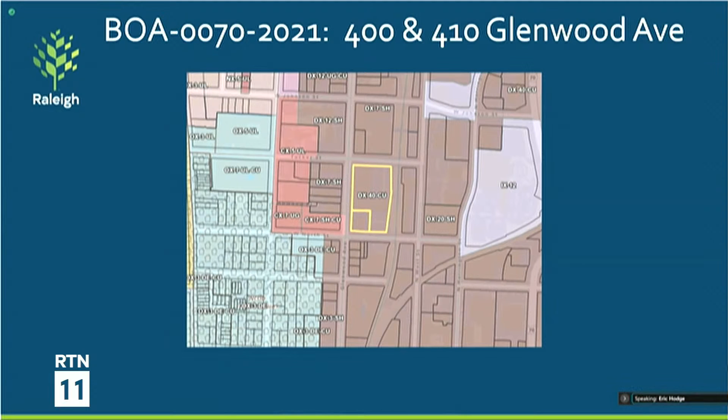The areas shown in gray are where the majority of the redevelopment is occurring, again with 2 towers: one at the southwest corner of this block, and the other running along the eastern side of the property between North Street and Tucker Street, with the eastern boundary of the property being the railroad track.

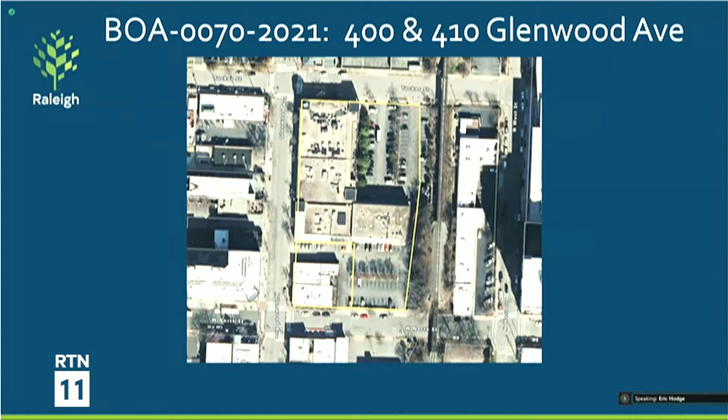I'm happy to answer any questions you have at this time, but I do know the applicant has a pretty detailed presentation that would go into a lot more of the specifics. I think you'll be able to understand what's under consideration once we go through the applicant's materials, but happy to answer anything if you have questions for me at this time.

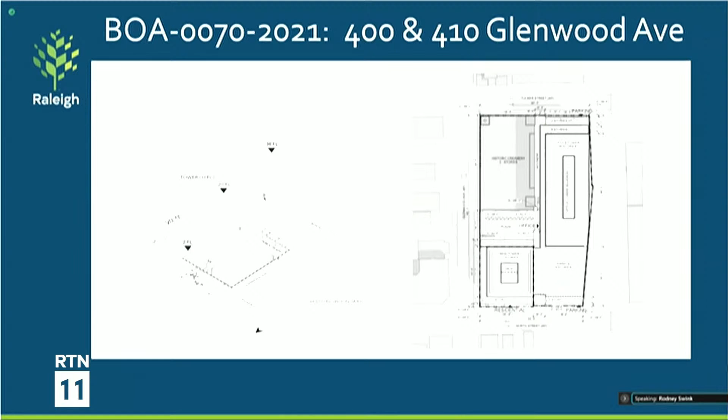Okay, thank you. Board members, any questions for Mr. Hodge? Okay, let's move on to the applicant, Collier Marsh. I believe you will be speaking for the applicant today. Welcome.

Good afternoon, Chair Swink and members of the board. I'm Collier Marsh with Parker Poe, 301 Fayetteville Street, on behalf of the applicant. I'd like to start by asking that our application, presentation, case report, and supporting materials be accepted into the record.

Okay. And we have several folks on the line, but we have one witness that I think most of the testimony will come from, and that's Fred Belledin, if we want to swear him in to start. Okay, let me go ahead and do that. Mr. Belledin, do you swear or affirm that the testimony you will provide will be the truth, the whole truth, and nothing but the truth?

I do. Thank you. All right, so the variances we have today relate to the proposed redevelopment of the historic Pine State Creamery site. As Eric mentioned, we're at 400 and 410 Glenwood Avenue. So 2 parcels, but 1 comprehensive development that looks at the whole site as a whole.

One of the things we're most excited about with this project is that as part of the redevelopment, the creamery itself, which is a local historic landmark, is being preserved. So our redevelopment occurs on the remainder of the site.

The site's gone through a number of approvals to get to this point already. Hopefully this is the last of the hearings, but the site was recently rezoned to DX40CU. We obtained 2 certificates of appropriateness from the Raleigh Historic Development Commission. The first of those addressed the overall massing, the setbacks, and the height of the project. And then the second got into a lot more of the detail and addressed the building design and materials.

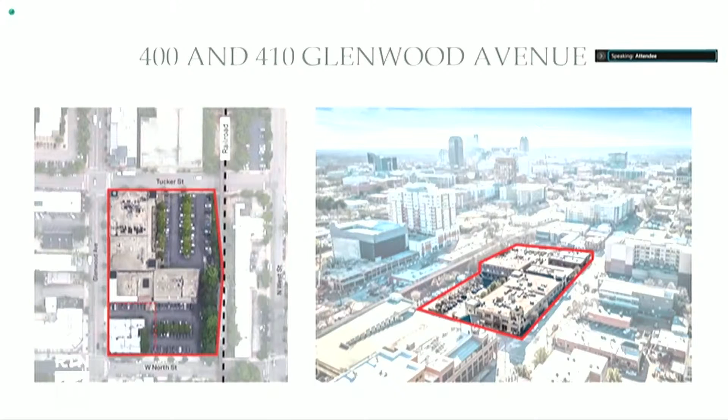The 400 parcel, the smaller parcel, as part of the zoning conditions, has shop front frontage applied to it, which impacts build-tos and setbacks. The remainder of the parcel could not have shop front frontage applied because the existing creamery building conflicts with those requirements. So if we're going to keep it, we couldn't meet it. The urban design guidelines would have called for shop front frontage to apply to the whole site.

It has frontage on Tucker and West North Street. That's the parcel where we're seeking relief, specifically on the West North Street frontage for setback relief, and on the eastern property line. The 400 parcel will be a 36-story mixed-use tower with frontage on Glenwood and West North Street, in the southwest corner of the site. There's also a galleria accessible to pedestrians and limited vehicle traffic that runs between the two towers.

You can see that large plaza running between the two sites, and the Woonerf running between the creamery and the 20-story building.

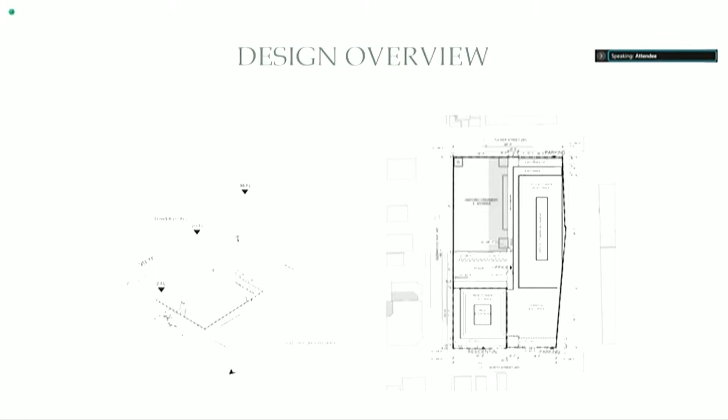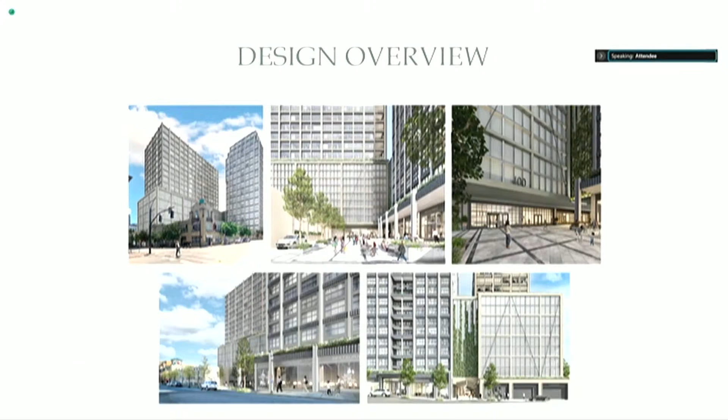So two things I want to point out with each of these requests. First, as I alluded to, we do have frontage on one site, the 400 site, but not the 410. But the UDO provides that if a frontage applies to the zoning of the site and the frontage has a build-to that conflicts with the setback requirements, that frontage's build-to actually controls. So here, the 400 parcel has shop front frontage, and what the UDO says is that you can have a 0-foot build-to with shop front frontage. So that 400 parcel is allowed to have a 0-foot build-to and doesn't have to comply with this 3-foot setback. But the 410 parcel, because we couldn't apply shop front frontage to it with the creamery, doesn't have the benefits provided by shop front frontage, but otherwise we've done our best to align the two buildings together.

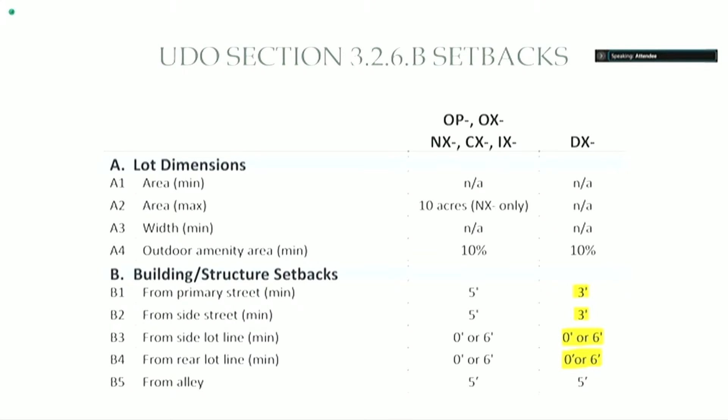Next slide, please. So as noted in the board's materials, we were originally seeking 6 total variances, although they only involved three total setbacks. Variances 1 and 2 related to Tucker Street, but our team worked some more to try and make some adjustments, and we no longer need relief on Tucker Street. So we have eliminated items 1 and 2 from our request, which takes us then to items 3 and 4.

Those relate to the West North Street setbacks, and we're seeking a 2-foot variance to allow a 1-foot setback on West North Street. But that is listed as 2 variances, one for the primary street and one for the side street, because due to the different buildings and entrances, it's not clear whether we have a primary street or side street. So we ask for both, just to make it clear under either interpretation.

Then the next two, or the last two variances, are variances 5 and 6 in your materials. They relate to the setback on the eastern property line along those railroad tracks. They seek a variable width setback ranging from 0 feet to 8 feet. Like the previous variances, it's listed separately as a side lot line and rear lot line setback because it's not clear which applies. So we're just asking for both, but it really is just one setback.

So at this point, I'd like to call our witness, Fred Belledin. Fred, if you could state your name, your address, your education, and your experience for the board.

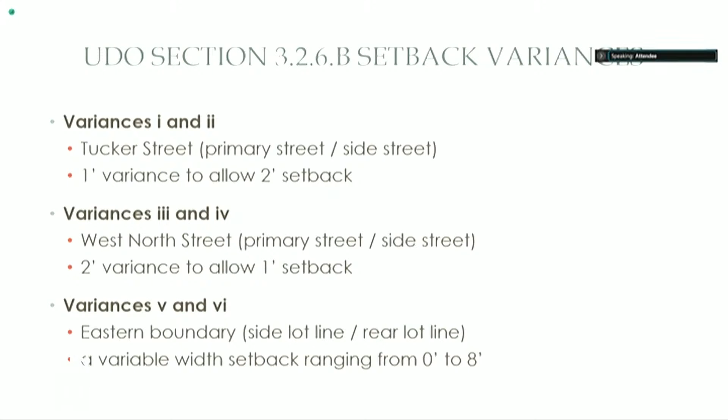So Fred, if you don't mind, walk the board through the factors that are driving the setbacks and then the relief that we are seeking. Sure. In this particular case, the source of the first variance or pair of variances is related to reconciling the differences between the 400 and 410 parcels. In particular, with the Creamery as the centerpiece for the redevelopment of the project, we are applying historic preservation best practices throughout the project, exemplified through the 2 certificates of appropriateness that we've received. Conversely, as Collier pointed out, the 400 parcel, because it is not part of the landmark designation, has a slightly different set of streetscape requirements based on the UDO.

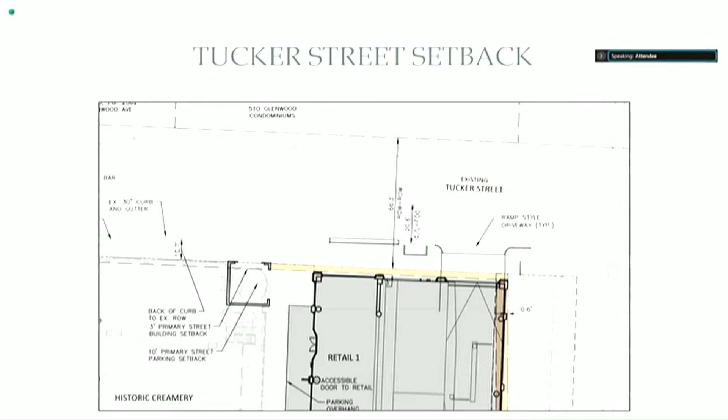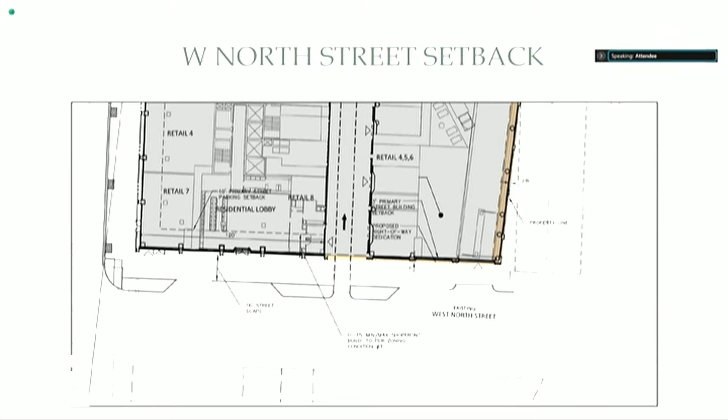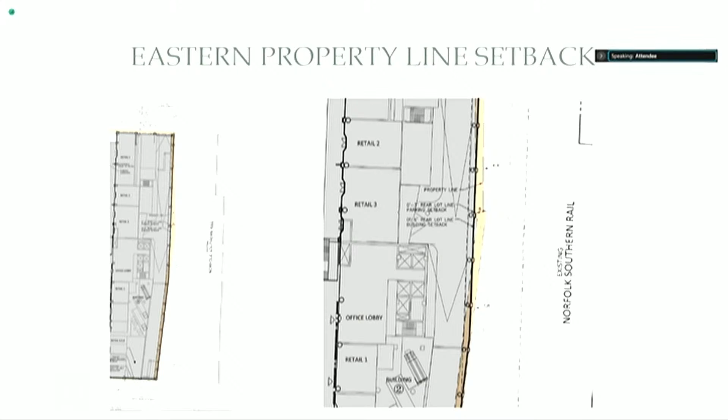So I'll quickly review the application of the variance findings to each of our requests, starting with the West North Street request, where we're seeking a 2-foot variance from the 3-foot requirement in order to have a 1-foot setback. Here, unnecessary hardship results because strict application of the ordinance results in conflicting standards for our two buildings.

We're doing our best to align all buildings with the existing street line and street wall established by the creamery. We're able to do that on the 400 parcel because it has shop front frontage that allows us to go right up to the streetscape and right up to the property line. Unfortunately, the same creamery that dictates building placement prevents us from applying shop front to the 410 parcel, so we don't have the same rules that apply, and we don't get to go to 0 feet automatically. So we have to seek relief.

This variance allows us to resolve that conflict and advance the historic preservation goals that drove the building design. Hardship results from conditions peculiar to the property—the existence of the historic creamery—and it allows us to do what we think is one of the best features of this project. We can preserve it this way, and design a project around it that honors it in the most appropriate way.

This did not result from actions taken by the applicant or the owner. It's merely the existence of that historic building that dates back several decades. It's also consistent with the spirit, purpose, and intent of the ordinance, because this resolves a conflict between the application of shopfront frontage across the entire site, while also allowing us to advance the historic preservation goals and design a project with historic preservation best practices.

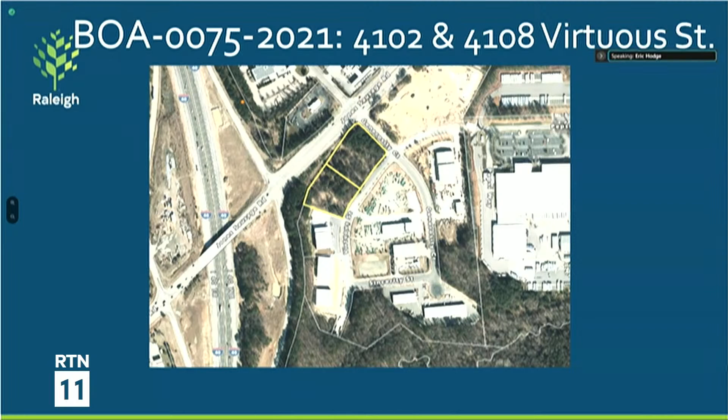The property is for the construction of a hotel on a 3.63 acre site zoned industrial mixed use 3, located near the intersection of Jones Sausage Road and I-40, an industrial area. In the lower right-hand corner is the Pepsi bottling plant, for orientation. On the right side, Pepsi Way leads to the Pepsi facility. Currently this parcel has this configuration, but there's a proposal to move the property line between these two parcels to the northeast, making the lower portion of these two sites larger. That's the portion under discussion for today's variances.

The first request is for a dumpster location that doesn't entirely conform to the locational requirements set forth in UDO 7.2.5.C.1. Briefly, that section says trash collection, trash compaction, recycling collection, and other similar service areas shall be located to the side or rear of buildings and must be screened from view from adjacent property or public street right of way. I'll let the applicant go into further detail regarding the dumpster facility, but it's proposed to be in the northeast corner, the upper right-hand corner of the site if north is at the top of this image.

The second portion of the request deals with the driveway in the lower left-hand corner of the site, where it is too close to the driveway on the property located to the southwest, or to the left in this image. Ideally it would have been located further to the right to better align with the driveway across the street. We do have transportation on the line if you'd like more specific detail on their thoughts regarding this variance. Otherwise, I'm happy to turn it over to the board for questions of me or transportation staff, or you may want to give transportation the opportunity to comment before the applicant makes a presentation.

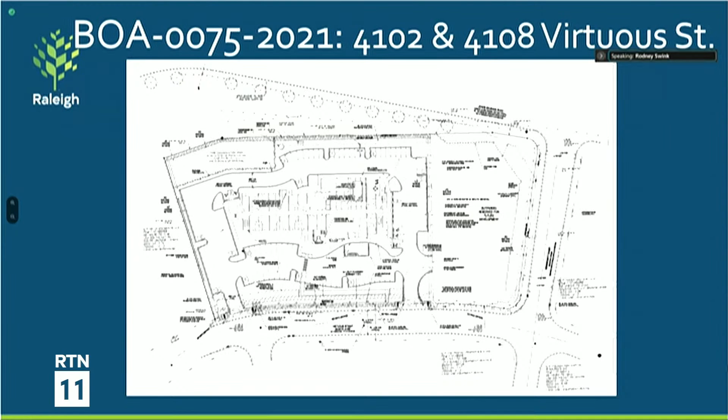We just spoke at length with Ms. Maddox and her client, and don't have any concerns to state for the board today. Okay, Glenn, thank you, appreciate that, and appreciate you being here. Board members, do you have any questions for either Mr. Kidd or Mr. Hodge? No one? All right, let's move along to the applicant then.

Isabel Maddox is here to speak to the case. Welcome. Thank you, can you hear me? Yes ma'am. Good, I'm on a new device today so I was a little concerned it might not work. I'm Isabel Maddox, PO Box 946, Raleigh 27602. I'm here today representing South Raleigh Suites QOZB LLC, an entity developing a hotel in an opportunity zone. Paul Meter, engineer with Rivers and Associates, is also on the line and can speak to any specificity about the engineering issues. First, I'd like to make a motion that the application materials and exhibits be admitted for the record. Okay, and let's go to our next slide please.

So we do have some hardships on this site. You saw the site plan a little bit, and we'll get to it again in a minute. We've got frontage on 3 streets: Jones Sausage, Virtuous, and I think it's Generosity. These street names are great. It's also a fairly small site. We do have a shod overlay. We have challenging topo with significant fall from the rear of the site to the front. But there's 3 street frontages, so what is the frontage? That's one of the main issues on the first request.

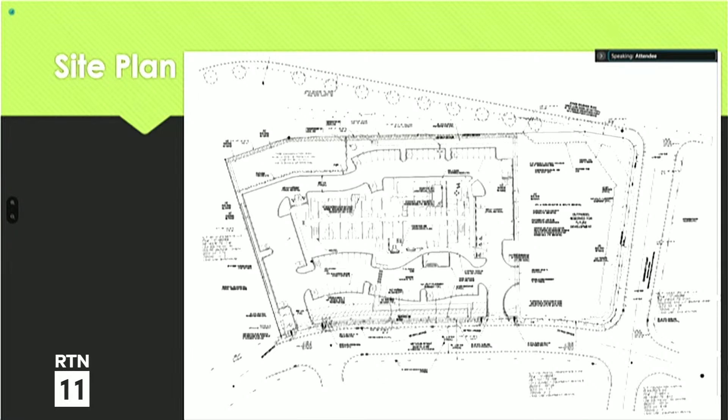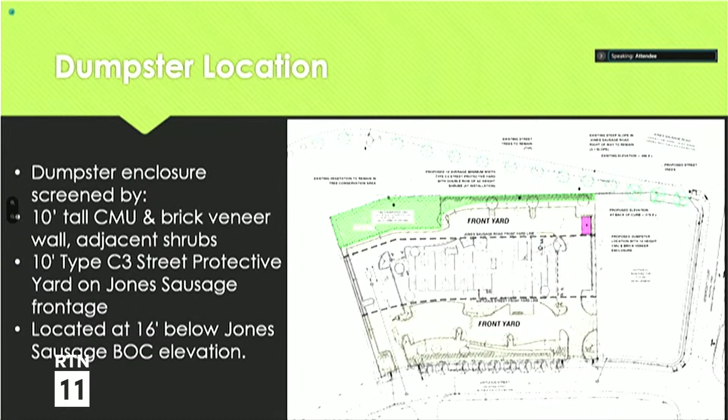So that shows a little bit better where the dumpster is. The green shows the landscaping that will be there to screen the dumpster. And I think the topo there is significant, which will eliminate really any ability to see it from the street.

We don't think it's really that meaningful to place it opposite the driveway across the street, because across the street is Sunbelt Rentals Equipment Company, and that's where their service entrance is. We don't really anticipate that the hotel patrons coming out of our site are going to want to go across the intersection. Normally you want a four-legged intersection with streets directly aligned so traffic moves efficiently across it. But in this case, we don't anticipate any traffic going from Sunbelt Rentals to the hotel site. They're just totally different types of users.

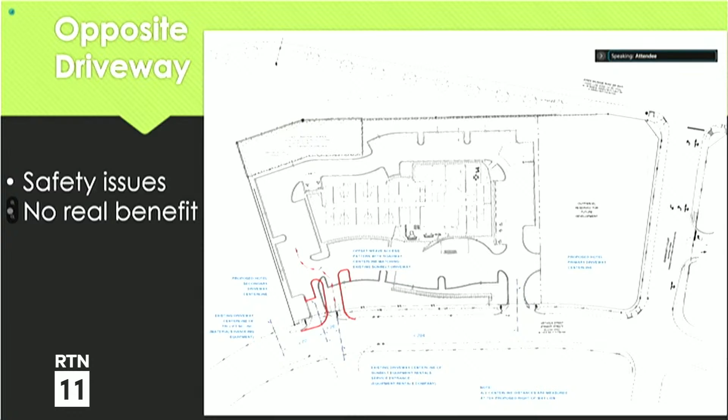And we do believe that we do have hardships here. We have frontage on 3 streets. We have significant fall on the property. We have the character of the traffic, it varies in this area. We're proposing to do a hotel, which we think will bring a much needed hotel to this area. It is an opportunity zone development. It'll bring some jobs to the area. And we think that the dumpster will be well screened by vegetation and by the fall and the property elevation.

The driveway spacing we think will maintain efficient movement and traffic. It's a dead end street, light industrial traffic, and we don't think the operation hours, the traffic hours will be the same for these two types of traffic. And we think that it's a real benefit to the city to have a hotel on this site.

So I do think that we have shown you that we have hardships. Those hardships were not self-created. We do think that safety will be preserved, and that this will be a positive development for the city. Mr. Meter is here to answer your engineering questions, and I'm here to answer whatever other questions you might have. Thank you.

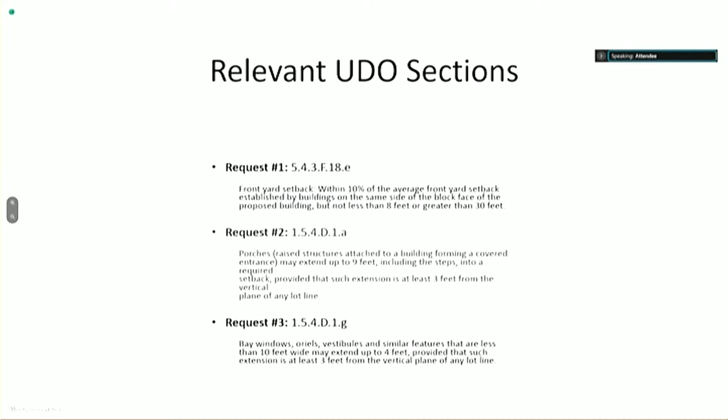So if we go to the next slide, these are the relevant UDO sections, which has already been covered. So we can move on to the next one.

Again, the request here is that we're given the appropriate amount of setback encroachment such that we can match the conditions of the adjacent buildings, and as a result create a continuous street front that forms a strong block face.

And the concerns here additionally is that the setbacks are calculated as an average, but not every lot has the same depth. A setback that seems appropriate for a lot that's 200 feet deep -- that would be 306, 314, and 316, very long, deep lots -- may not work for our current project site, which has been subdivided at some point prior to the owner's acquiring of the site. So we are left with only 70 feet in which to build a structure. Every foot counts in this case, and a typical setback that you might find on a deeper lot may not work on a much shallower lot.

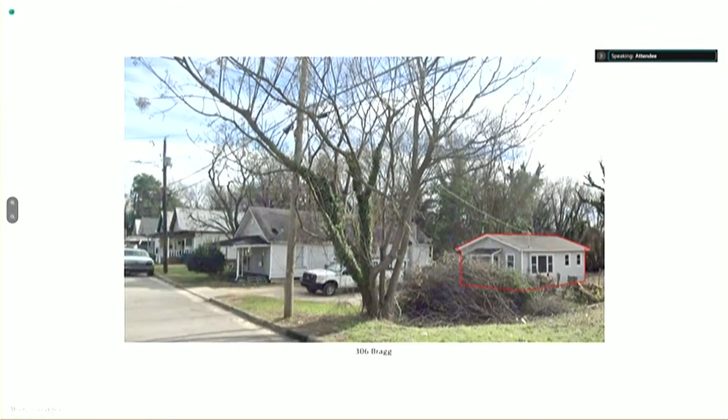And if we go to the next slide, we have 306 Bragg, which is, I'll call it a problematic or rather non-conforming property, which is set back quite a bit from the street. It's definitely an anomalous condition not found anywhere else on this block. So this is kind of the crux of the issue.

The 5.9 foot encroachment that we've proposed is not a random number. It's simply the calculation of the average setback that excludes this particular property. So in effect, what we're asking is that we're allowed to continue to use the NCOD rules, just without including this non-conforming site in the calculation method. So next slide.

So once again, this is a site plan facing north for 322 Bragg, measuring 70 by 30. Next slide.

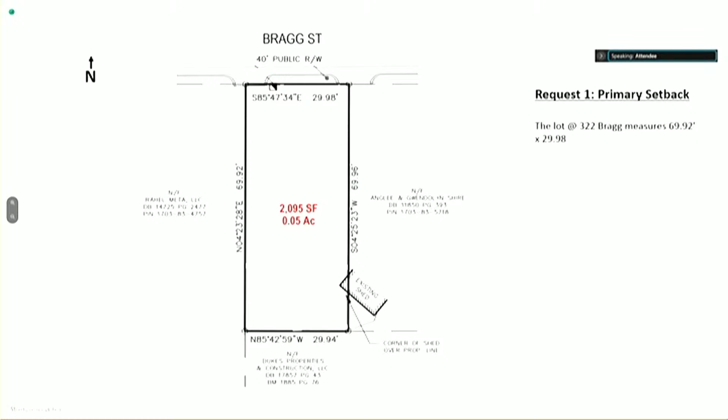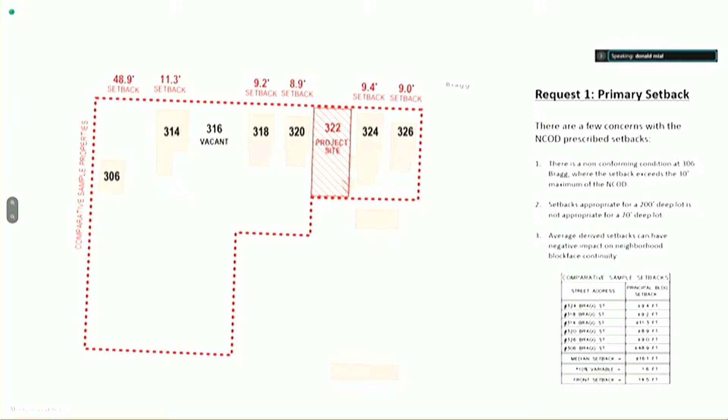So is there a safety concern there, if that be the case? As soon as people step out of their home, they run right into the street? The current fabric of that particular block exhibits that condition, and there is a little bit of buffer, in that the right-of-way doesn't start until at least about 3 feet past all of the setbacks we've just discussed. I think there's a 3 foot minimum setback required from any property line, so that we are preserving that buffer, so you don't walk out of your porch directly onto Bragg Street.

Okay, all right, thank you. Yes, thank you, Mr. Mial.

I do have a question, and it probably speaks to my misunderstanding about architectural features, but the bay and vestibule opportunity and the porch are added together, and I'm trying to picture a situation where you would have both present. If you have a front porch across the house, I don't see why you would have a bay. So I'm trying to understand why we're getting credit for both of those distances. Maybe it's not possible without a drawing, but can you explain that, Mr. Choi?

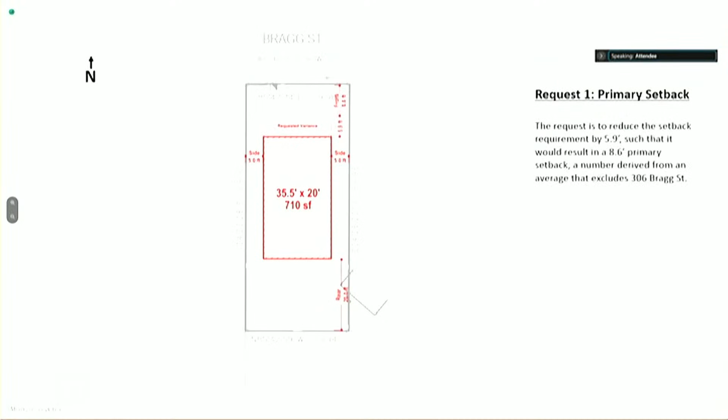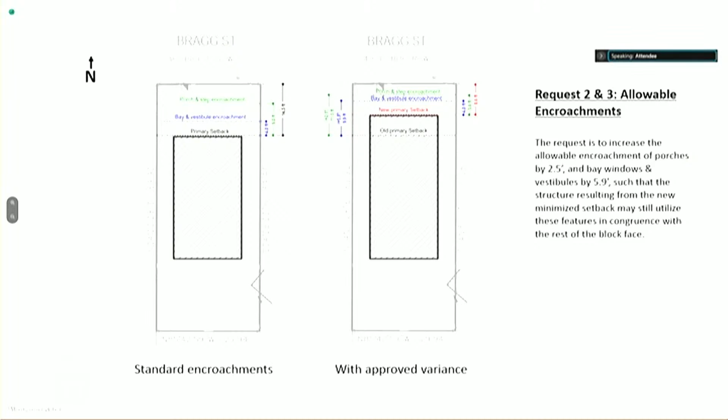Yes, one clarification I'll make is that those two encroachments are independent of each other, not on top of the bay encroachment. In this drawing, if we go to the next slide, which is zoomed in, I'll start with the standard encroachment on the left. The blue line is where one could project either a bay window or a vestibule no wider than 10 feet, projecting up to 4 feet past the primary setback. The green line is where you can project a porch or an entry step into the primary setback, labeled 9 feet.

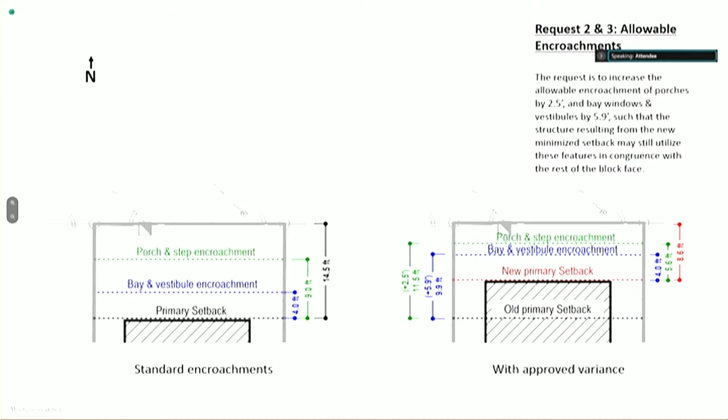So the way they relate to the primary setback is independent of each other. It wouldn't be bay window then porch added on top. Okay, yeah, they're not cumulative. Okay, thank you, I appreciate the clarification.

Okay, any other board questions? No one? Okay, again, no one signed up in either support or opposition to speak on this, so any closing statements from the applicant? Nope. Anything else from Mr. Hodge? No, sir.

Okay, moving along, evidentiary hearing 4. It says 10608 and 10604 DeHuston Court, 11258 Raven Ridge Road. This is the Raven Ridge Development LLC property owner. This is variance 78-2021.

Mr. Hodge, I understand we have urban forestry staff available if we need them, but I'm going to ask you to make the presentation and then we'll see if we need to do a reaffirmation of the oath. All right.

Property owner Raven Ridge Development LLC requests a variance to Unified Development Ordinance Section 9.1.9.A.1, which requires that trees must either be preserved or planted as one contiguous area or scattered areas throughout the lot, but that no required tree area may be less than 1/5 of the total gross land area required to be set aside for trees. In order to designate forestation areas on the site, the applicant is proposing areas that are less than 1/5, or in this case, 1.23 acres of the required 6.16 acres of tree forestation in association with the construction of townhomes on a 20.22 acre assemblage of land.

Properties located at 10608 and 10604 DeHuston Court and 11258 Raven Ridge Road.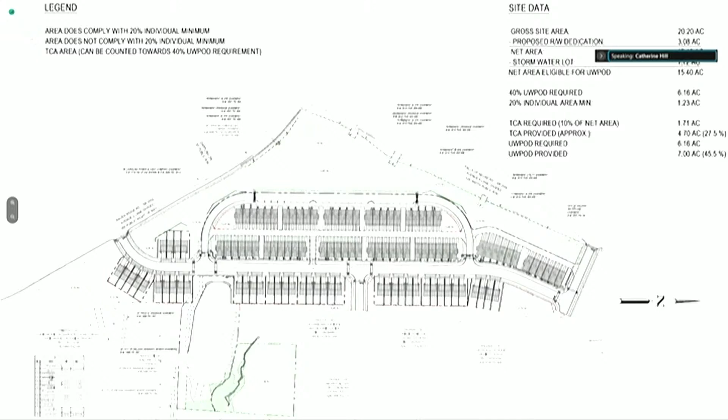I can try. One thing you have to, I'm trying to see, what is this property zoned? PD, okay. So part of your hardship analysis is what is a reasonable use of the property. And sometimes that has to do with what are all of the allowable uses on the property. If all they can do is a single family home, you have some balancing that comes in with that. So just because they're proposing a variance to allow for more townhomes does not in and of itself mean that it's a self-created hardship. There's that balancing test about what is a reasonable use of the property.

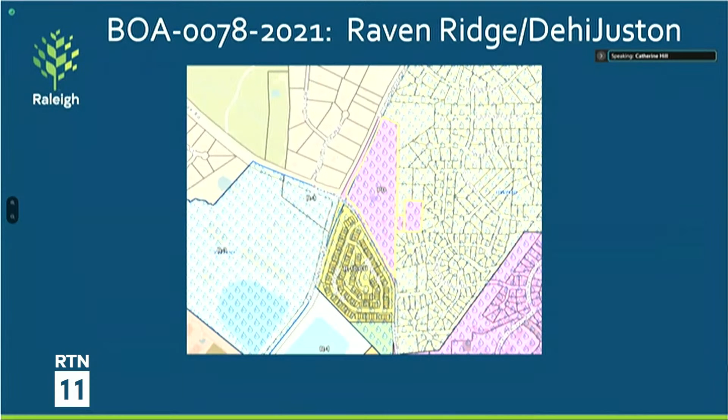Self-created hardship is normally more direct. I've seen property that's been subdivided in such a way that now, by the property, they did something where they put themselves in a position where they couldn't comply. But I do think it's a great question, and it comes down to that balancing test and what you think is an appropriate, or the board thinks is an appropriate and reasonable use of the property.

Right. Okay, thank you, that helps. And again, I think the efforts to meet the forestation requirements are legitimate, but I'm just trying to understand that little threshold, what triggers that. So thank you. Other board member questions? Anyone?

Okay, we have no one signed up to speak in support. We do have an opponent signed up today, Novelet Judge.

If you're with us, would you please state your address and your relationship to the case, and I will reaffirm your oath. This is Keegan McDonald, the moderator. I am not seeing Novelet Judge listed on the attendee list. Perhaps they're logged in under a different name, and if so, they can send me a message, but again, they are not listed as an attendee. Well, thank you. That's why I said if you're here, because I wasn't sure. Thank you for clarifying that.

So in that case, board members, any other questions from you? Mr. Mills, anything you'd like to add in the way of closing statements? Yes, sir, Mr. Swink. Thank you.

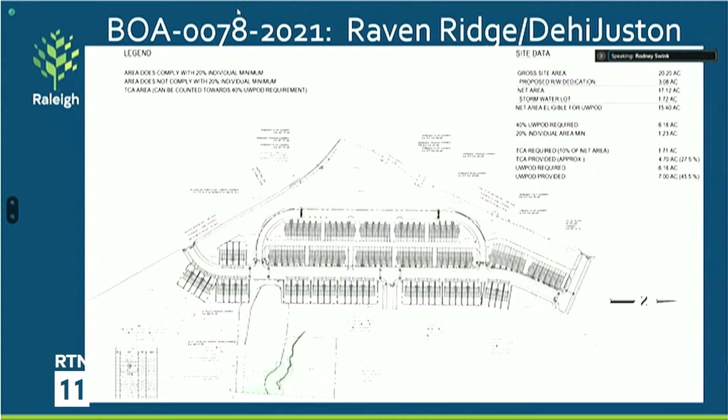Anyone? This is Mr. Mile. I'll go ahead and make a motion to approve. Thank you, Mr. Mile. May I have a second? I'll second. Thank you, Ms. Rudisill. We have a motion to approve and a second. Any further discussion? Let's move to a roll call vote, please.

Thank you. On the motion to approve: Mr. Mile, approve. Ms. Rudisill, approve. Mr. Coons, approve. Mr. Rainey, approve. Chairman Swink, approve. Thank you, that makes 5. Okay, thank you very much.

Now let's move along to our next hearing, number 5. This is 3249 Blue Ridge Road, the Summit Church, Homestead Heights Baptist Church Incorporated, property owner, variance 79-2021. Mr. Hodge.

The owners, the Summit Church, request a 0.5 acre variance to Unified Development Ordinance Section 9.1.3, which requires that properties 2 acres or greater dedicate at least 10% of its gross site area as tree conservation area prior to subdivision approval, resulting in 0.89 acres of tree conservation if approved, in order to subdivide the 13.89 acre parcel. It's a split zoned piece of property, the right portion being R4 and the left, or southwestern, portion being office mixed use 3, parking limited, conditional use.

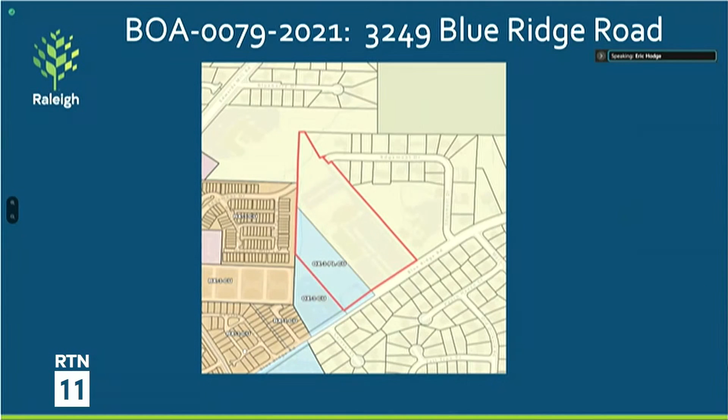There's an office building as well as the church property located on the right-hand portion of the property. Again, they're looking to subdivide the parcel in the lower southwestern portion of the property, similar to where the zoning line is today for the OX3 PLCU. Again, this area in blue is what's up for subdivision. However, the acreage of the entirety of the parcel is what triggers the amount of tree conservation that would need to be included.

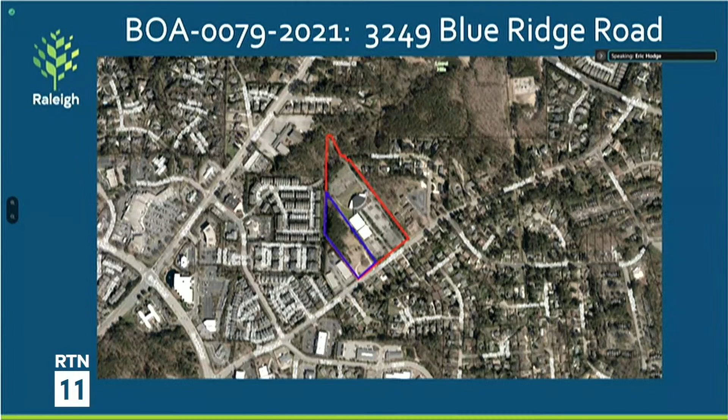Here's the subdivision plan and proposed tree conservation areas. I would note that in board docs, just prior to the beginning of this meeting, we updated the information with some updated slides, which I believe are in this presentation, as well as a revised condition that has been reviewed by the city's forestry staff and city attorney's office. That language is in board docs as a new attachment, I believe it's called proposed condition and exhibit, if you all would like to have that available when we get to that portion of the conversation.

But similarly to this last matter, this is a tree conservation issue. Chris Crum, being the subject matter expert, can go into more detail regarding the requirement, the variance request, and if needed, the details of the proposed condition. Okay, thank you. Now that might be better left for once the applicant has presented. Yeah, sure, thank you, good guidance. Board members, any questions for Mr. Hodge? And we'll hold Mr. Crum in abeyance.

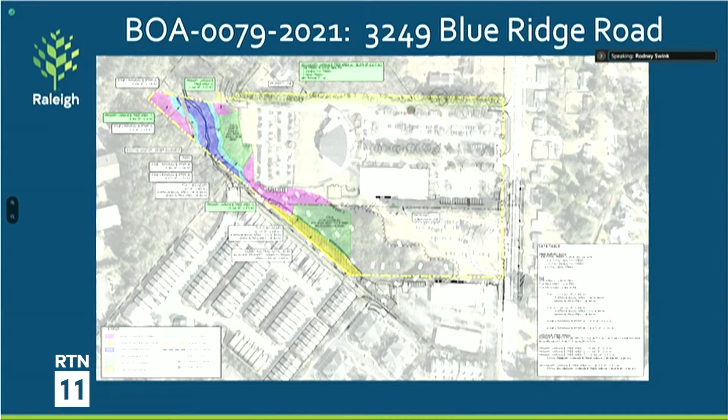Let us move now to Mr. Michael Birch of Worth Mills on this case. Go ahead. Yes, sir, Chairman Swink, this is Michael Birch. Can you hear me okay? Yes, sir. Thank you. Great.

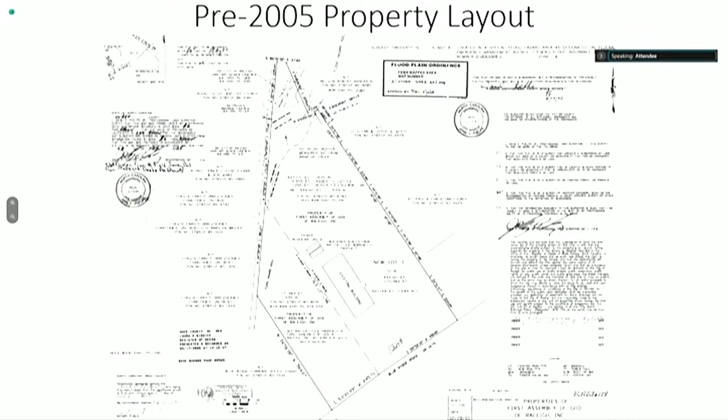So if we can go forward one slide. Again, I want to touch on the history of the property. So the buildings that you see on the old church property, the 9.9 acre portion of the property, those buildings and parking areas all existed prior to the recombination in 2005.

The 2 buildings with the white roofs closest to Blue Ridge were built in 1978, along with the parking areas beside it and along Blue Ridge Road. The building behind it and the parking lot behind it, those improvements were made in 1997. So all of these improvements on the 9.9 acre property were made prior to the tree conservation area regulations, which weren't adopted and imposed until 2005.

When the predecessor church made the improvements in 1997 for that new building and parking area, it removed what was essentially all wooded area. It removed a significant number of trees that could otherwise have qualified for protection as tree conservation area, if the regulations were in effect at that time. But of course, they weren't in effect then.

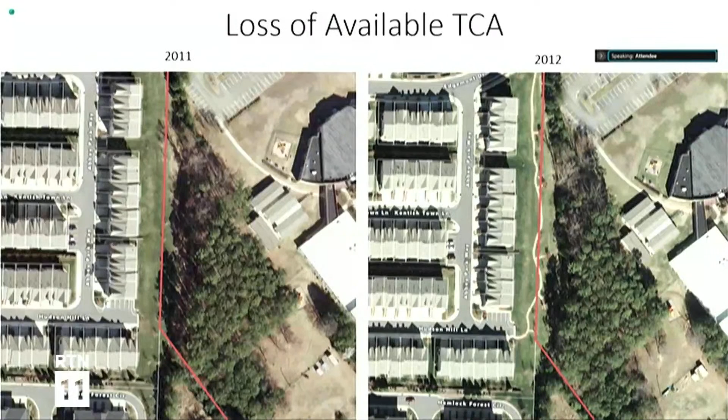So if we could go back 2 slides, maybe one more. I want to highlight again the unnecessary hardship. Without a variance, that 4-acre portion of the property would be severely limited in terms of buildable area and could not be developed for the medical office building that was permitted and allowed by the rezoning approved by City Council in November of last year.

The unnecessary hardship is a result of things that are peculiar to the property: the sewer easement, the stream, the area impacted by the townhome encroachment, and the timing of the improvements that were made on that church site, which essentially eliminated the ability to count hardly any of that property as compliant TCA area.

And then the recombination with really no action after that. What that did is it essentially incorporated this area that is now, without a variance, largely burdened and bears the large burden of compliance for this whole 13.89 acre tract. So all of the actions that have been mentioned are not actions of the current owner.

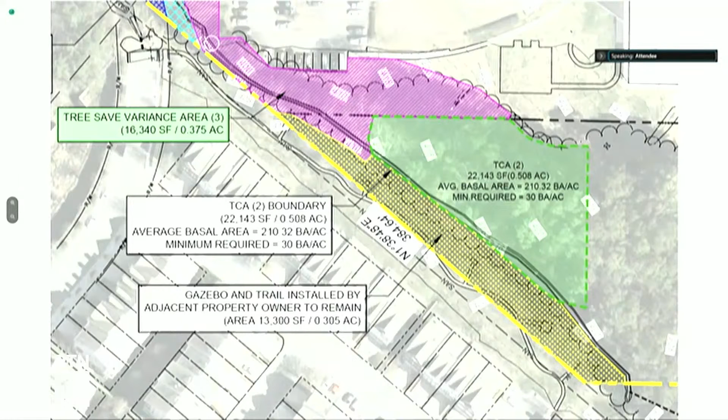Trees could not be removed, and as you can see, this area is adjacent to a home on plan left, as well as the church on plan right. So we think these areas meet the intent of the tree conservation ordinance, given they have healthy trees and existing tree coverage, located in appropriate places to lessen impact on surrounding development.

I also want to note, while it's not directly related, through the rezoning process we engaged very meaningfully with all of our neighbors, particularly the adjacent townhomes. The rezoning conditions that apply to this 4-acre area limit the impact of development by limiting hours of operation of the medical office use, requiring a minimum setback of 100 feet, limiting height, limiting lighting, requiring a buffer, and again, if we didn't designate an area TCA. All of this is compliant with that as well.

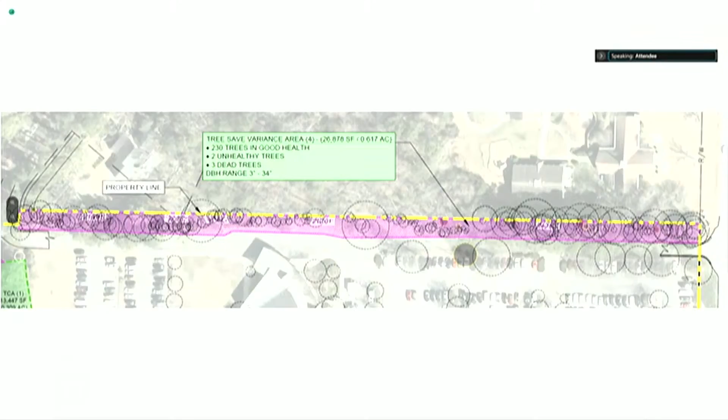If we could go back to just the large exhibit. I want to reemphasize that with this condition of approval, we are providing protecting trees for 12.5% of the gross site area, which is over and above the code requirement for tree conservation. These areas would otherwise comply, but for not meeting the minimum dimension standards in the code. As you can see, they're adjacent to qualifying areas and supplement these well. So, with that, I certainly want to ask for the board's support of this variance request.

Also want to ask the board, if there aren't any questions immediately, to recognize Dave Wysochansky so that he can provide some comment to the board as well.

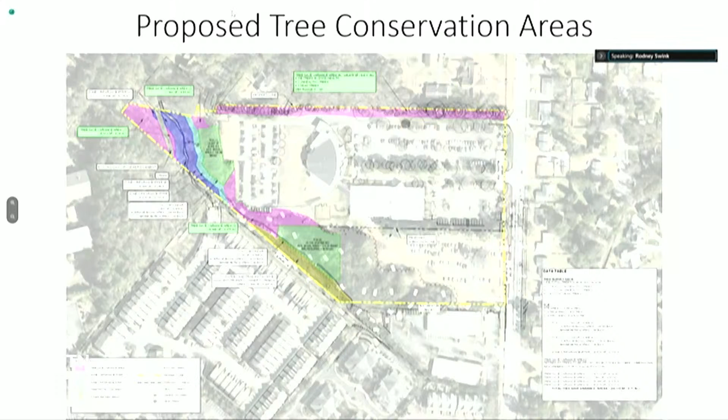Okay, well, no one else signed up to speak either in support or opposition. So, Mr. Birch, any last word from you? No, sir, we appreciate the board's consideration of this. Thank you. And Mr. Hodge, I'll give you the opportunity. Anything else? Nothing else from me at this time. Okay, hearing no board questions, I'm going to close the evidentiary hearing and move to our deliberations.

And I'll just open it by saying, as you were presenting this, I was thinking, wouldn't it be great if the bigger parcel could continue to carry some of that burden?

I didn't understand exactly the way this was being framed, so I was delighted when you actually started proposing that. That makes me happy—you know about trees, I'm always going to say something about that. I'm pleased with the effort to make this work.

I understand there was a condition. Mr. Puccini or Ms. Hill, do y'all have the language of that condition, or do we need someone to state it? I do, and I can read it into the record. I'm also wondering, Eric, if you have it and can pull it up on the screen—there's language and a coordinating image. Let me pull that up.

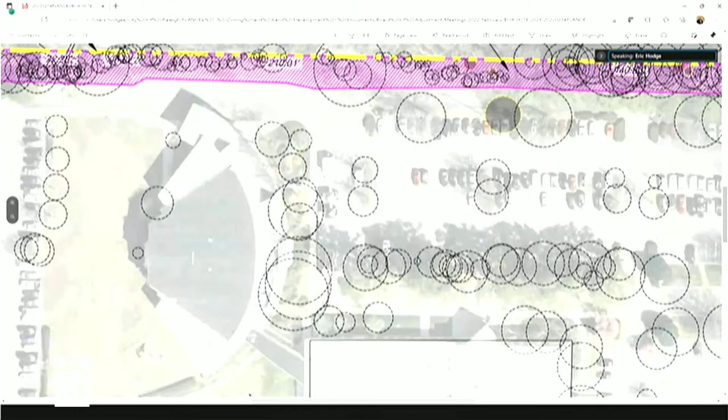Hold on just a moment. That might make it larger, please. Is that large enough? I can zoom in a little. And then, do you have the one that references the February 10th exhibit? Do you have that as well that you can toggle? Perfect, I do. There you go. So do you want the condition or the—yeah, there you go. So here's the language.

We can read it into the record since it's just shown on the screen: the property owner shall provide at least 6.4% gross site area of UDO compliant tree conservation area. In lieu of designating other portions of the property that might otherwise qualify as UDO compliant tree conservation areas, the property owner shall not remove existing trees within areas identified as tree save variance area 1, 2, 3, and 4, on the attached exhibit titled Blue Ridge Road Tree Survey Exhibit, dated February 10th, 2022, prepared by Timmons Group. However, trees within these tree save variance areas that are unhealthy, dead, or diseased may be removed. The amount of UDO compliant tree conservation areas plus the amount of tree save variance areas shall total at least 12.5% gross site area of the property.

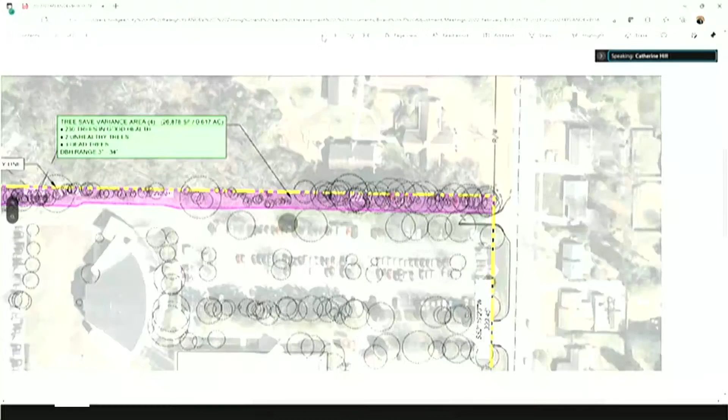Then if you scroll down to the image, you can see those variance areas: tree save area variance 1, tree save area variance 2, tree save variance area 3, and tree save variance area 4. Those are the four that Mr. Birch just walked through in this exhibit.

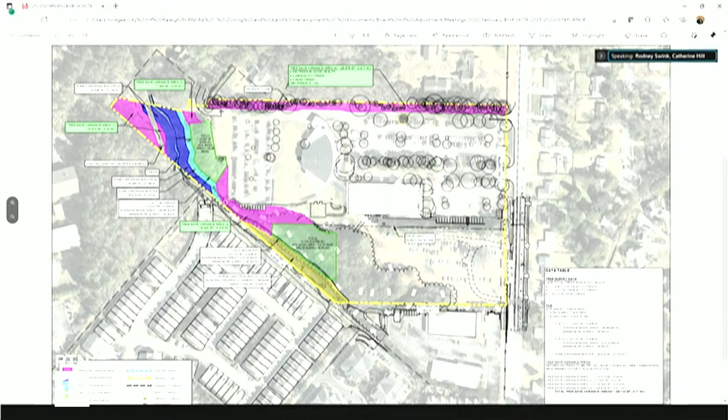Great, perfect, very good. Well, with that, I'm going to move this along by moving that we approve this with the condition that's been offered. So I move approval with the condition as offered. Is there a second? Second. Mr. Mile, thank you for that second. Anyone else, further discussion? Then let's move to a roll call vote, please.

On the motion to approve: Chairman Swink, approve. Secretary Mile, approve. Vice Chairman Kuntz, approve. Thank you, Ms. Rudisil, approve. Thank you, Mr. Rainey, approve. Thank you, that makes five.

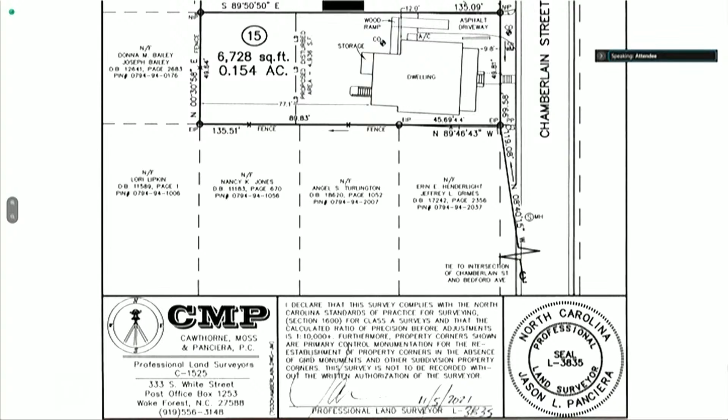This slide identifies the available homes from which we collected our median setback. The Oberlin Village Overlay District requires the front yard setback for new homes be within 10% of the median front yard setback established by buildings on the same side of the block face of the proposed building.

We have three properties here: 719 Chamberlain, the most north, built in 1950, approximately 55 feet from Chamberlain Street. Moving south, 717 Chamberlain Street, built in 1949, approximately 45 feet from Chamberlain Street. And lastly, 707 Chamberlain, built in 2016 subject to these overlay front yard setback rules, approximately 15 feet from Chamberlain Street.

So as you see these newer homes being built and old homes torn down, you again see these homes located closer to Chamberlain, just as we're asking to do here. Next slide, please. This slide shows a proposed floor plan with Chamberlain Street on the right-hand side, the rear yard on the left-hand side.

Apologies for those inverted measurements here, but I will read off the relevant ones. So you can see a two-car garage on the northern part of the lot, approximately 20 feet from Chamberlain Street, which leaves us approximately 23 to 24 feet of depth for a rear yard.

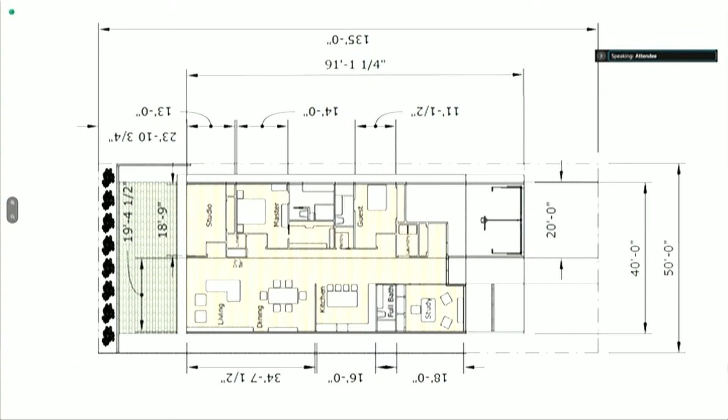So this next slide is the style that Mr. and Mrs. Kimball intend to build on the lot. It's a one-story modest ranch, very similar, at least in terms of size, to previous homes and existing homes within this neighborhood.

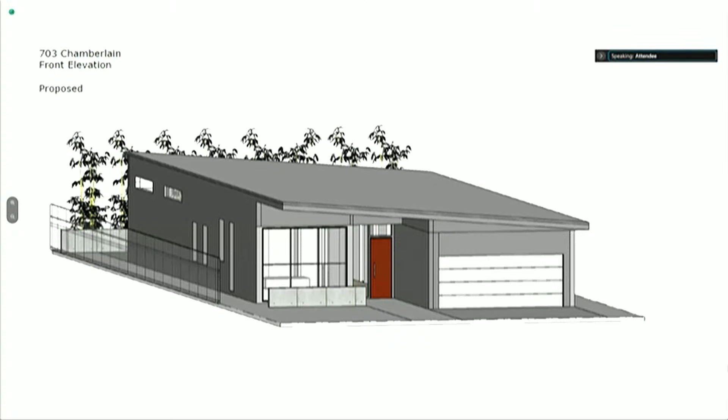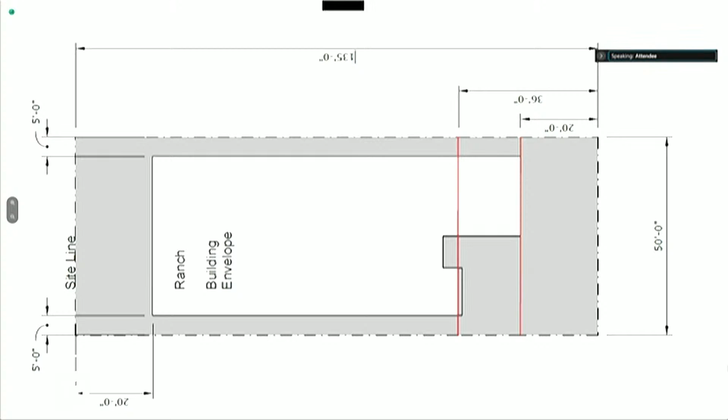And then lastly, you can see this is a less detailed building footprint and how this building fits within the lot. Again, that 20-foot rear yard is the closest that the UDO will permit a new home under this R6 zoning. So we've got the 20-foot rear yard setback squeezing us on the backside and what could be a 45 to 50-foot front yard setback from Chamberlain Street, which leaves you with very little buildable space for a new home.

The Raleigh Historic Development Commission issues a report for each historic district within the city. When it described the street side character of Oberlin Village, it said that it is comprised of a mix of small shotguns, tri-gable houses, and bungalows with small front yards set close to the street. So again, I just want to affirm that what we are proposing is consistent with the historical character.

Of the Oberlin Village District, as well as what the 10% median front yard setback is trying to accomplish, save for the three properties that we're having to take as our sample, which are much further back than many other homes within this district. Next slide. And here I'll just show different parts of the district.

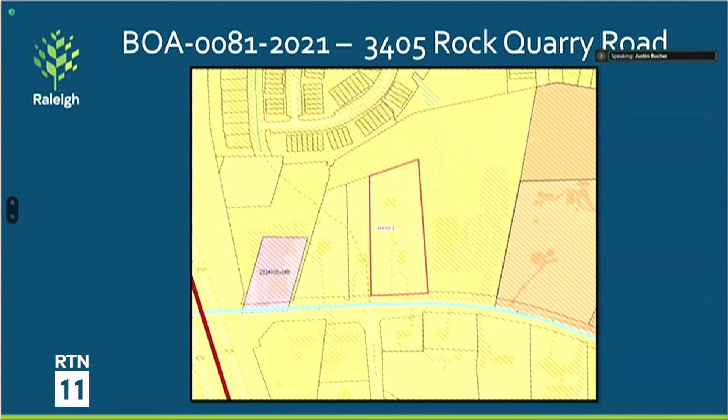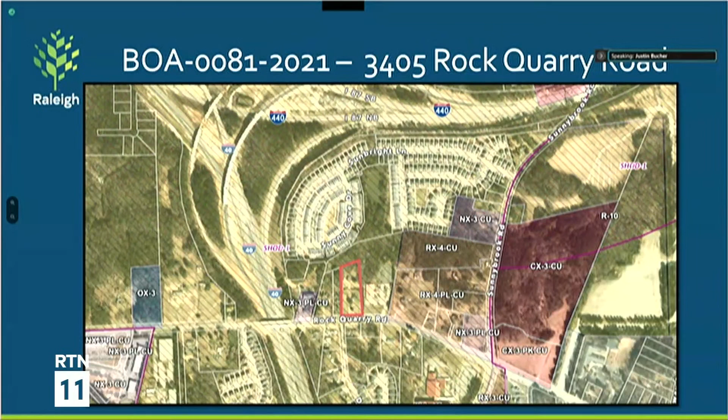Just to provide some context, you can see the subject property here outlined in red. It's located just southeast of where 440 and 40 meet. And then it is shown here also in red. It is a 2.88 acre lot, zoned R6, located within the Special Highway Overlay District.

Shown here is the applicant-provided plot plan. Happy to answer any questions now. Otherwise, I can hand it over to the applicant. Okay, thank you. Board members, questions?

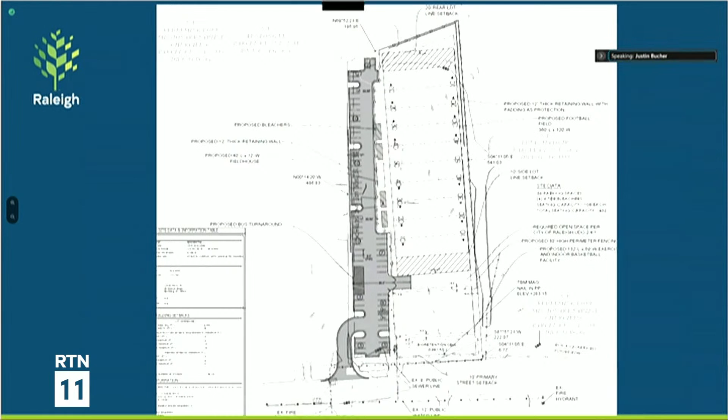Okay, let's move along. Crystal Redding is the attorney representing the applicant. Let me remind you that any witnesses you call must reaffirm their oath on the record before testifying, but please present your case.

Good afternoon. Can you hear me fine? We can, thank you. Greetings to the board and Chair Swink, and I appreciate the introduction, Mr. Bucher. My name is Attorney Crystal Redding. I represent AV Ventures NC LLC, who is the applicant in this matter. This is a special use permit application for the proposed use located at 3405 Rock Quarry Road in Raleigh. I would also like to take this moment to thank Mr. Eric Hodge and Mr. Justin Bucher and Attorney Catherine Hill for their assistance throughout this process. I would ask that the application materials and exhibits be made part of the record, please.

Okay, and Chair Swink, we have witnesses today that would include Mr. Michael Artis, who is the architectural engineer and a professional engineer for this subject property and the project. Ms. Redding, excuse me for just a minute. Yes. Mr. Brasini is raising his hand. Do you have a question? Yes, please, Mr. Chairman. Ms. Redding, would you please give me your address, please? Oh, I'm sorry, it's 4600 Marriott Drive, Suite 200, Raleigh, North Carolina. Thank you so much. You're welcome.

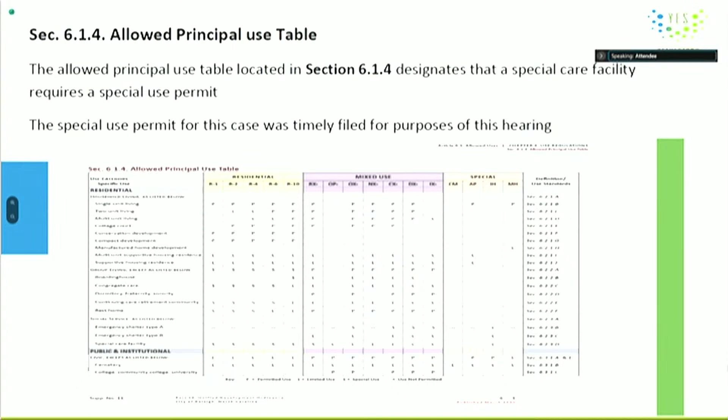Next slide, please. We also wanted to point out that section 6.1.5 lists the prohibited uses in this area, and none of the uses planned for this special care facility fall within any of these prohibited uses. Some of those listed are a manufactured home, open dump, school administrative personnel offices, and a sign not explicitly allowed in the zoning district. None of these uses are what is planned for this particular facility. Next slide, please.

This proposed use, as I've stated previously, is allowable for R6 as a special care facility. Section 6.2.3.d.1 defines what a special care facility is, and Mr. Bucher was kind enough to read those particular services. Those are the services that will be provided by Yelverton's Enrichment Services, Inc., including social and emotional rehabilitation, educational support services, and mental health management through the use of physical wellness training to children and adolescents who live with severe and persistent mental illness.

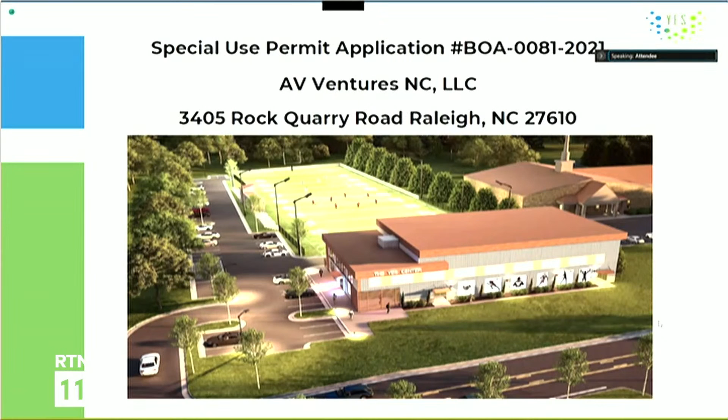Thank you, Mr. Artis. I'll come back to you at a later slide. Ms. Yelverton, can you describe the operating hours for the facility and how traffic will be handled for pick up and drop off? And if we could return to the slide about compatibility with adjacent uses in terms of location, scale, site design, and hours of operation.

Thank you, Attorney Crystal, while we navigate to that slide. Yes, the hours of operation are typically Monday through Friday, starting as early as 8 a.m. and ending sometime between 5 or 6 p.m. We may also have a Saturday day treatment event between maybe 9 a.m. and 1 p.m.

In regards to pick up and drop off, we will have ample parking and room in our parking area for parents or caregivers to make their drops for their children or for the respective students. We also have it designed so a bus will be able to come in and back out within the parking area to drive back out of our premises.

So it should be minimal on-street stops, minimal barrier or stoppage for the flow of traffic. In other words, the parking area—and Mr. Artis can address this as well—should provide enough room for the number of cars you'd expect from participants in the program to come in, drop off, turn around and exit the facility without causing a backup on Rock Quarry Road.

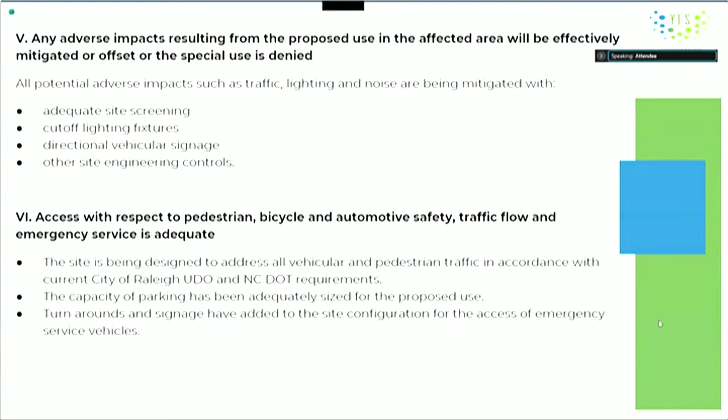Yes, it is. When we did the rendering, we were trying to bring some architectural features to the building, and I think it's pretty attractive what we did. However, the UDO would not allow that type of signage of that size in that type of zoning. So we will cut back the signage and we will adhere to the regulations. No problem, we'll do that.

And as far as any appropriate dedications of streets and utilities to the public, will they be made prior to the issuance of any building permits? Yes, we're currently working with the city of Raleigh. The entrance, as you see it, that is what I call a paper road that the city has in their iMap system, and so that piece of asphalt would feed right on into a paper road in the event that the adjacent site to the left would be developed. So that piece of pavement would probably need to be dedicated to the city so that it will be maintained by the city. So that will be taken care of prior to any building permit.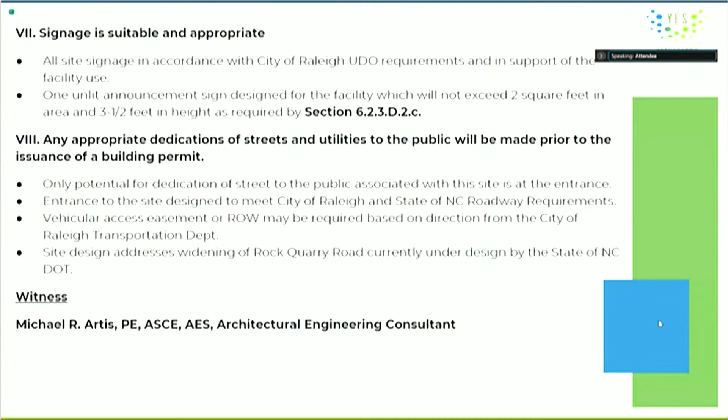Thank you, Attorney Crystal. And again, I'm not sure if Ms. Tiki will be able to also share, but Yelverton's is excited at the opportunity to continue to serve the community. We've been successfully doing so for over 15 years, and we hold international accreditation. We also hold our licensure through the Division of Health Service Regulation. And so while we're able to provide this level of support to the community, to the students in need, again, we're excited to be able to integrate mental wellness and physical wellness, being able to meet the children where they are, being able to do skill building activities while also doing other activities that kind of take their mind off of the fact that they're actually learning something behavioral related.

We also are excited at the opportunity to expand our services to be able to serve that side of the Raleigh area. And there are adjacent schools that we currently support that will be also in close proximity to, including a preeminent charter school. So again, we appreciate everyone's time today in hearing our case regarding our ongoing journey in serving and providing mental wellness supports to the community.

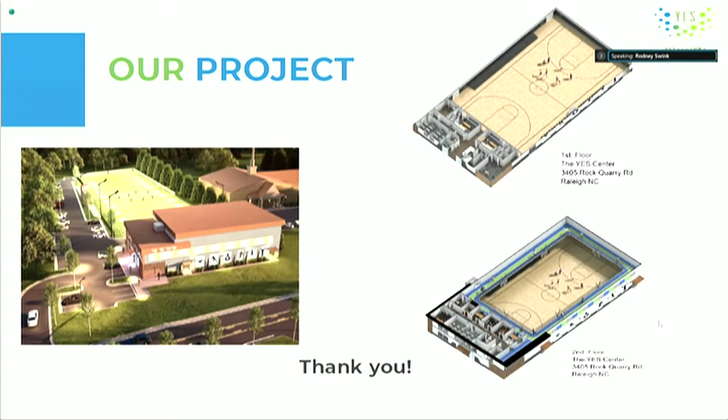Okay, let's move on to evidentiary hearing 8. This is 200, 206, and 210 Southwest Street, Research Triangle Regional Public Transportation Authority, the property owner. This is BOA 0082-2021. Mr. Booker, bring us up to date.

Yes, thank you. This next case is located at 200, 206, and 210 Southwest Street. The property owner, Research Triangle Regional Public Transportation Authority, requests a variance for complete relief from the 3-foot primary street setback requirements as set forth in UDO section 3.2.6.B1. This is in association with the construction of a bus transit facility. I'll go on to the next slide.

So the lots shown here in yellow comprise 1.76 acres in size, and they are zoned DX-40-CU. Here is a closer aerial view of the property.

Per the applicant, the existing east and north facades of the building encroach into the right-of-way, and portions of these facades are intended to be preserved in their current location and incorporated into the new transit facility, hence the need for the variance. Both Southwest Street and West Hargett Street are considered primary streets, so the 3-foot primary street building setback requirement applies to both of those frontages.

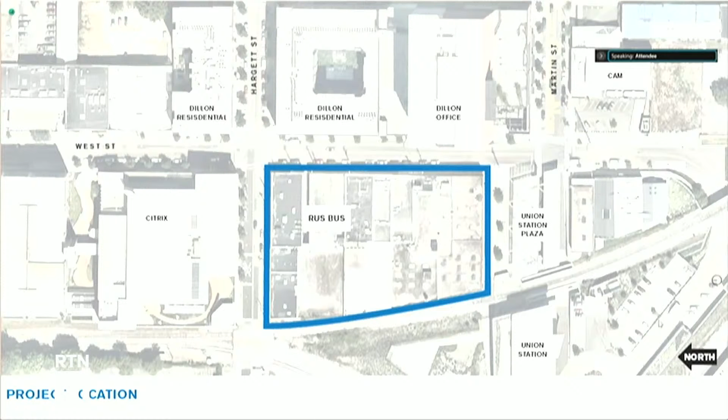So the slide you see on your screen is here for orientation. You're all familiar with Raleigh Union Station there at the bottom right, and the plaza in front of it just above. North is to your left and south is to your right here. The site we're looking at is the future home of Raleigh Union Station Bus Station, otherwise known as Russ Bus. It's across from the Dillon to the east and across from Citrix to the north. Next slide please.

Just to give you a feel for the overall project, there's a lot going on this site. Go Triangle owns the property, and the idea is to provide a true mixed-use experience here in this expanded transit hub with the rail and the bus uses. The tower, or the two-part tower you see to the left or center of your screen, that's a hotel tower with a residential tower to the north, with retail along West Street as well. And then, of course, the bus station within.

Next slide please. Another view of the same building, and here we're looking northwest. This is as though you're standing on West Street. I want to draw your attention to those areas shown - I think you can tell those are supposed to be brick there, in the corner, heading into the plaza, as well as north along West Street. That's just one view of the brick that is intended. Next slide please.

And these are the existing buildings on the site. As you know, this is part of the warehouse district, and we have some existing warehouse buildings on the site, built in 1920. The plan for the project is to accomplish all of the uses you saw while maintaining some of the architecture and the scale of the street, and to retain a piece of the history of the warehouse district. In order to do that, portions of these existing brick walls are proposed to be maintained in place. Next slide please.

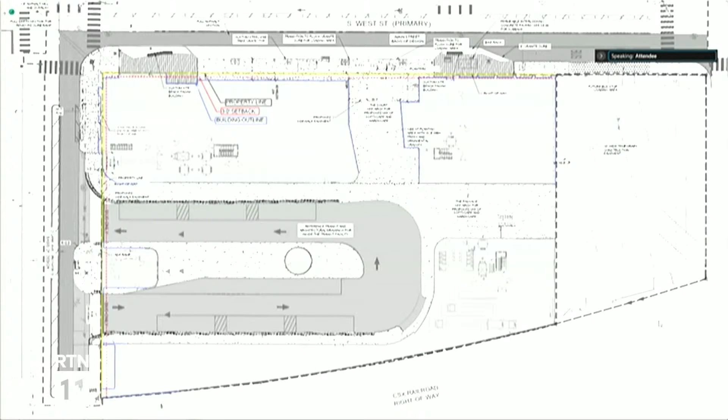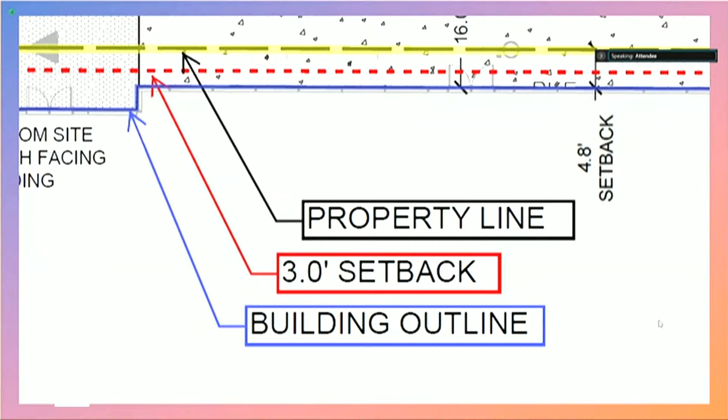First, I'll begin by zooming in on the key, and this is what's important. So there you see that property line in yellow, and of course the required 3-foot setback in red, and those don't vary with respect to each other, so you'll see that consistently around the site. The blue line, of course, is that building outline, and that's going to vary quite a bit as we go around the property. Now, you heard Justin say earlier that some of these walls actually sit within the right-of-way, and that's true - we'll talk more about that. We are here, of course, only for the setback request, so that 3 feet between the property line and the required setback. That is the request we're making today. Like you said, that building does extend into the right-of-way. That is a separate approval the city would have to give us, but here, we're here just for that setback variance. Next slide please.

So starting, I'll go roughly clockwise around the site, starting at the northwest corner of the site. So you see that blue line, and here it does extend in places, not only beyond the setback, but also into that right-of-way as we talked about. Most of this is new, but this is continuing the building line from what we'll see as we move to the east. Next slide please.

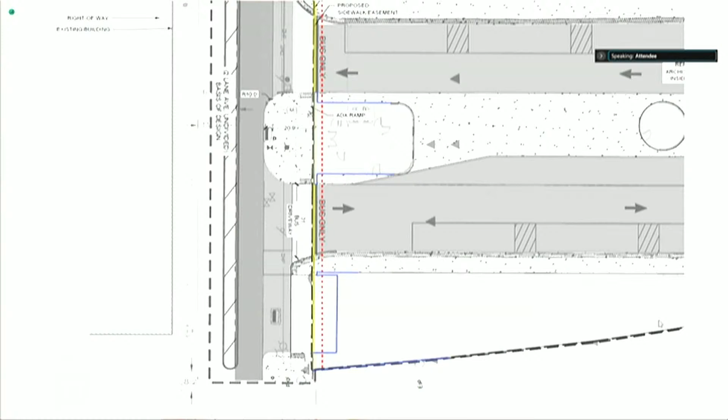And here, as we move to the corner of Hargett and West Street, that's where you really see this is that preserved corner. So here's where that blue line starts to project out into the street. As I mentioned, we're just looking for that 3-foot setback variance, which would allow us to put the building line on the right-of-way line. We will have to get that separate approval to actually keep it there in the street. Next slide please.

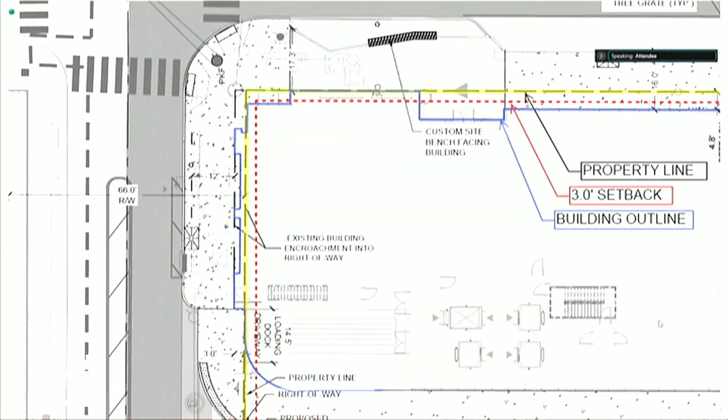And here we move down West Street toward the Raleigh Union Station Plaza area. Here, again, we are within the setback in certain areas, and that is existing building. We don't have that same setback along the plaza. That is actually a 0-foot required setback, so we don't have the same request on that side. This is really just along West Street and along Hargett Street.

So that is what the request is about. We could just leave it. Yeah, we could leave it there.

That's perfect. So I did want to go through the standards that we need to meet in order to be granted a variance today. The first being that an unnecessary hardship would result from the strict application of the ordinance. Here, a strict application of the ordinance would simply require those walls to go away. It is not going to be workable to preserve those walls in their current state but move them, and so that is not something that could happen in a different location.

As I mentioned, those were constructed in 1920. So similar to what you see at the Dillon across the street, we would be able to keep some of those pieces in place. Next slide, please. Oh, I'm sorry, I'll get back to this point. If we could go back, that's perfect.

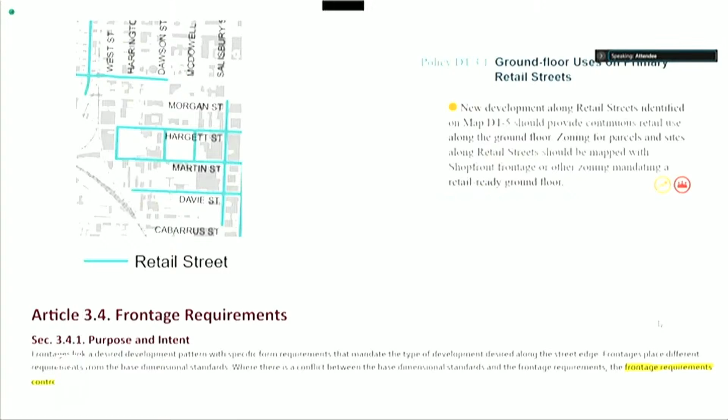The hardship does result from conditions peculiar to the property, these existing 100-year-old buildings. And of course, the applicant or property owner did not build these buildings. And the requested variance is consistent with the spirit, purpose, and intent of the ordinance in multiple ways.

First, by maintaining a piece of that existing built character of the warehouse district. Preserving that facade will only provide benefit to the city without detriment. As I mentioned, those walls exist in that location today.

Also, the Comprehensive Plan Policy DT Downtown 3.1 supports application of a shop front frontage, particularly along West Street here. And as you heard earlier today with the Creamery site, that's generally supported in the DX district we're in. That shop front frontage, as you heard earlier, would have replaced that required 3-foot setback with a build-to line that can be as little as 0 feet. So it would have allowed that building to be up at the right of way, that 0-foot setback.

What happened on this site, because of the intensive access needs of a bus station, it's simply not possible to actually apply the shop front frontage. It doesn't apply here. It limits the ability to access the site in a fairly extreme way, and so it's not compatible with a bus station.

However, when this site was rezoned to allow for the bus station, they did their best to approximate a shop front frontage by including certain conditions that reflect some of those requirements, such as a mixed-use building type, prohibiting parking between the building and the street, requiring pedestrian access along West Street, and requiring the ground story along West Street to have active uses to really try to recreate that frontage.

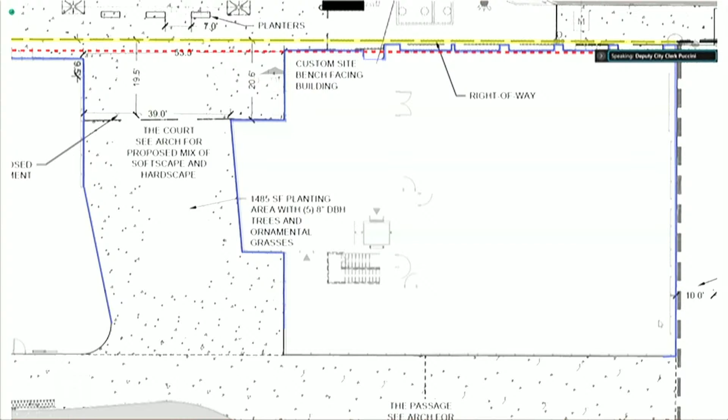We have one more hearing today, and there seems to be quite a bit of interest in this one, so I think this one may take a while. I'm going to ask for a brief recess. Ms. Hill, I see you raising your hand. Yes, we have been contacted by the applicant, and it's my understanding that they want to request a continuance. I don't know if you still want to do a recess, but the applicant's attorney, Mr. Birch, is on the line to make that request once you open the case. Terrific. Well, then let's move right along. Thank you so much for that.

This is case 1333, 1335, 1337, 1339, 1341, and 1343 Courtland Drive. This is 1335 Courtland LLC property owner, BOA 83-2021. And Mr. Birch, I understand you have a request for us.

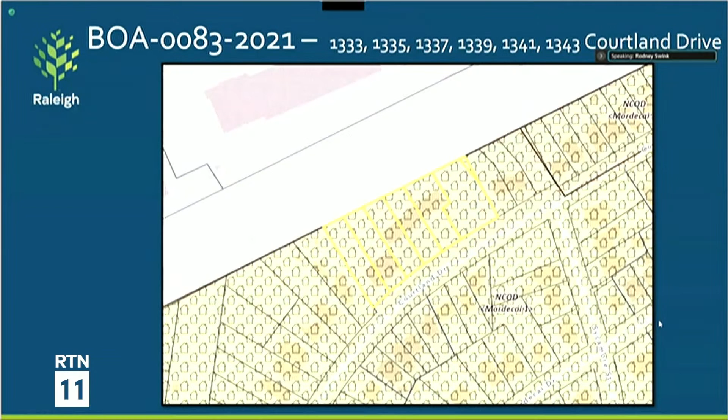Yes, sir, Chairman Swink. On behalf of the applicant, we are asking that the board defer discussion of this matter until the board's meeting on March 14th, to allow additional time for conversation with those who are in opposition to the request. Okay, thank you very much. Without further comment, unless the board has an objection, we will defer this to the March 14th board meeting, at which time we will take it up. So thank you, Mr. Birch, for bringing that to our attention.

Thank you. So that changes the complexity of what I was thinking the next hour might look like. So let's move along to our other business. That would be the approval of the minutes from our January 10th, 2022 board meeting. They were sent out to us. Any additions or corrections, or a motion to approve?

They look good to me. Motion to approve, Coontz. Mr. Puccini, I just wanted to make sure the chairman had noted that in those minutes, I had Mr. Sutton listed as attending, and he was not. So the minutes have been corrected to remove Mr. Sutton as having attended, so those are the ones that will be published for you to approve. Okay, thank you.

Okay, Mr. Coontz, you move to approve. I'll second. So we have a motion to approve and a second. We'll go to the roll call vote. Approve to approve the minutes as corrected. Mr. Coontz? Approve. Mr. Swink? Approve. Mr. Mile? Approve. Ms. Rudisill? Approve. Mr. Rainey? Approve.

A report of our board's attorney, Ms. Hill. I see some beautiful red roses in your background. I wonder if that's just a coincidence. No, happy Valentine's Day to everyone. Yeah, exactly, happy Valentine's Day. I'll let my husband know you noticed him. He'll appreciate that.